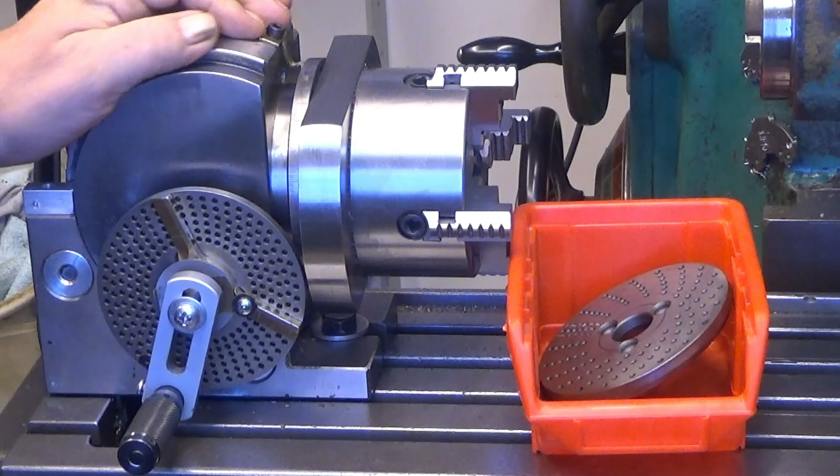Okay, here is the dividing head in question. And first let's take some things away from this.

Indirect indexing first. I have here a basket with all the indirect indexing components. And this is really something - it's just a flimsy tin. Okay, and then this one looks like it's brass, but actually it's cast zinc.

And then, I have replaced most of these fasteners so that I can use the same tool for this. This used to be so that you needed three different tools to get these plates away. And that's the story of this dividing head.

Please don't drop these onto the floor. And then the plate comes away. That's about the dividing head indirect indexing, and why I wanted to remove this. Now we need a different tool.

Maybe that one. This is because I want to disengage the worm. I don't want it to...

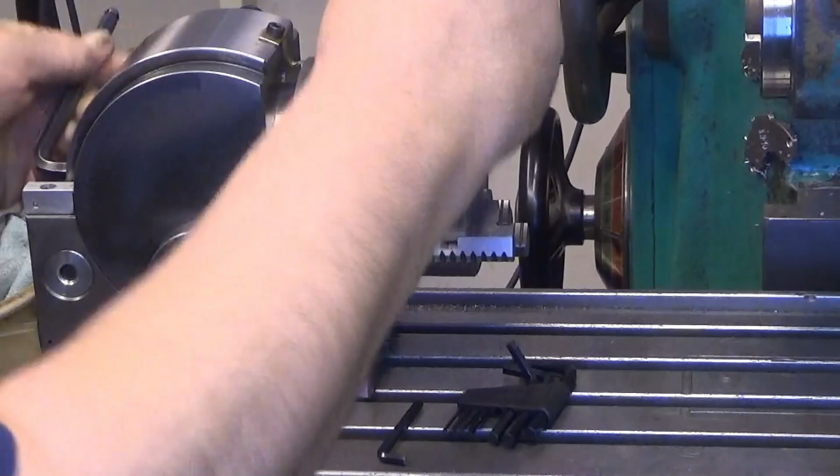Now this chuck, this system, I have a drawbar here. And this one, okay, it's like that. So we have here in the back - let me show you when it comes out.

It's like this - it's actually a very strange nut in the backside here. And then I should be able, if I engage the brake really tightly...

Which way is loose? This way. You shouldn't tighten it - so now you can. This one has - I think this is something like a Myford nose, I believe.

I don't know what this is called, but as you can see, there is a drawbar, and this one you can thread in. Maybe - let's not do it this way. So that's the chuck. So now we start to have access to all these components.

And that one I put also aside. And now comes the small components, and for those I need this. We have 3 little hex cap screws there.

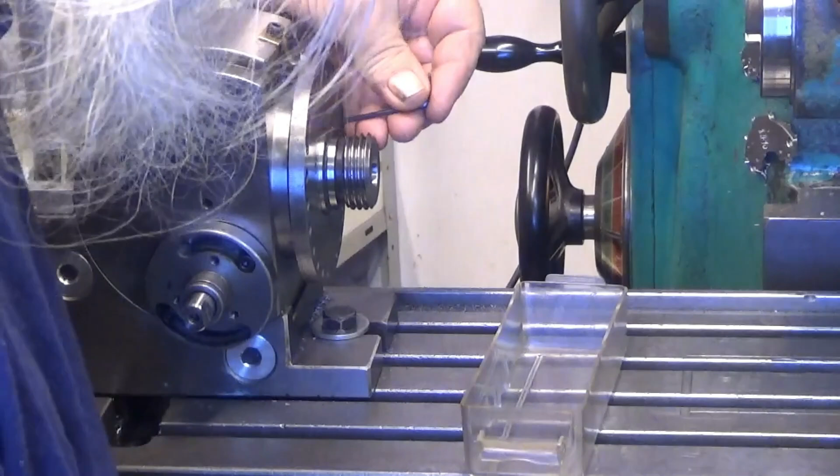What was the size? It's not this, it's something different. Let's try that first. Too big. Next. No, that was the previous one.

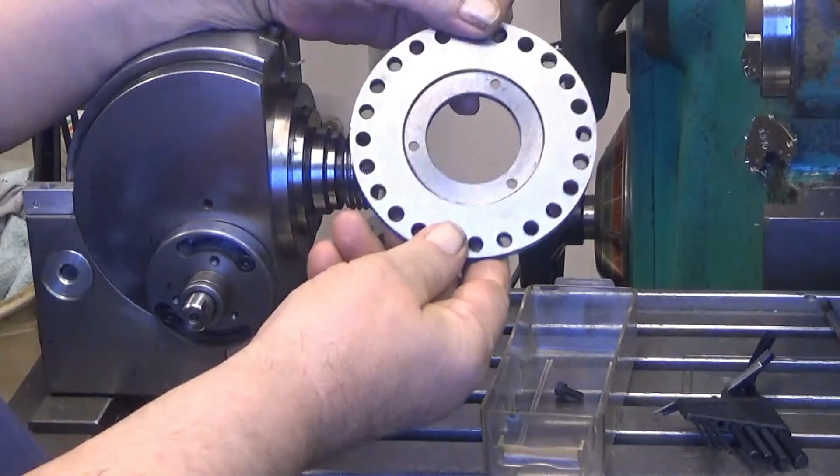Okay, these are easy enough to get away from here. That's loose now. Okay, last one - so then this comes off. This is just, as you can see, attached with 3 screws. And then we have the 24 direct indexing holes there.

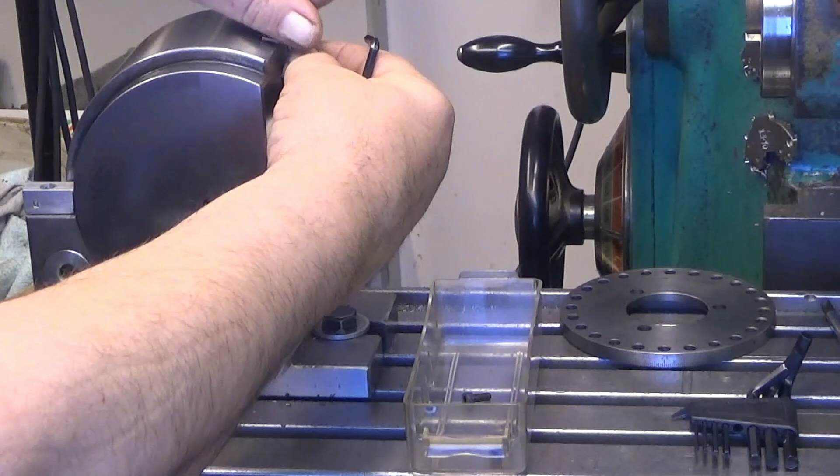Okay, and then we have that one, and that one is different. We need to take this away as well. That's a mildly funny looking thing, but it is - there it is. Okay, let the screw be there.

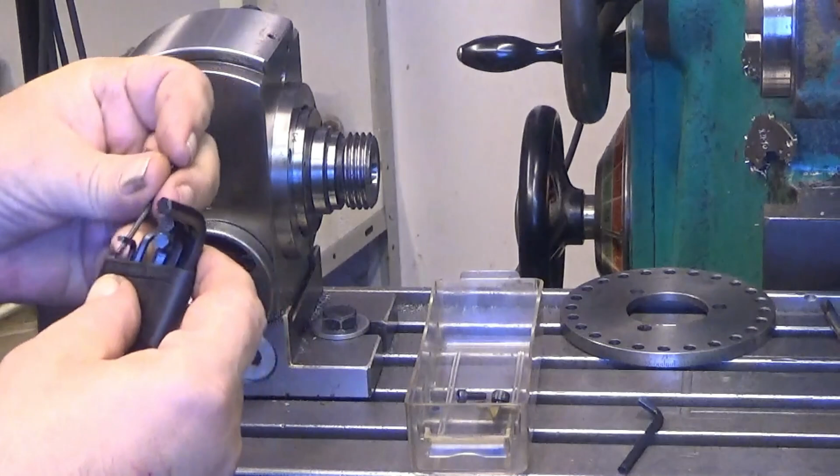And then in order to get this away, we have - I think it was really small - this one. We have here something, it's next. These are really small, really tiny. Oh yeah, okay, so you will soon see what comes out from here.

And this, I believe, is not the original design at all of Brown & Sharpe. This should be something else, I believe - not a grub screw like this, because this is the pinion now. It locks this, and if you look, it goes right into the middle of this.

It shouldn't. I think the original design was such that when you had this screw, it went over here, so it locked it that way in place. And this was, I think, rounded, so that when you put it there you couldn't get it out from there. So now this is one component I already took out.

This pin from there - this pin is something that when this disc is there, it will go by the pinion. Here is a rack. You can push it from some into the holes here like that. It pushes it into the hole, and yeah, that's the way how this works.

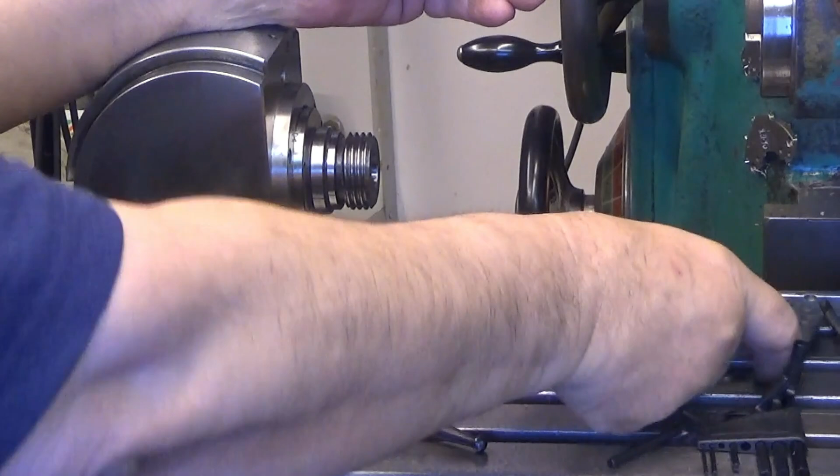But now the problem here is that the teeth here do not mesh - it slips. Now if I put this into here, it goes into that. Oh man! Need to be careful. Oh man!

Let's try with these - these have a wider tip, the others were needle sharp. Hopefully this fits in - yeah, it does, so I can get it out from there. Oh man, so it drops in. So it comes inside here from the side, and then like that, and then you can push it with this one. And it's really sloppy.

At the critical point it is really sloppy. And this also has all sorts of... yeah, okay, anyway.

I would estimate that the gear teeth are about 1 millimeter too low. If I measure it from here, so there is a flat. This is a 10 millimeter pin originally, so it is about 10 millimeters. Yeah, there is a little bit of a taper here, and it's not straight.

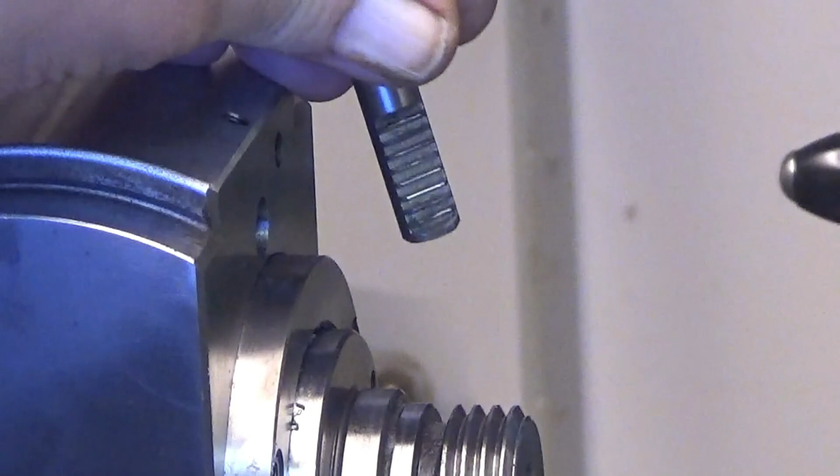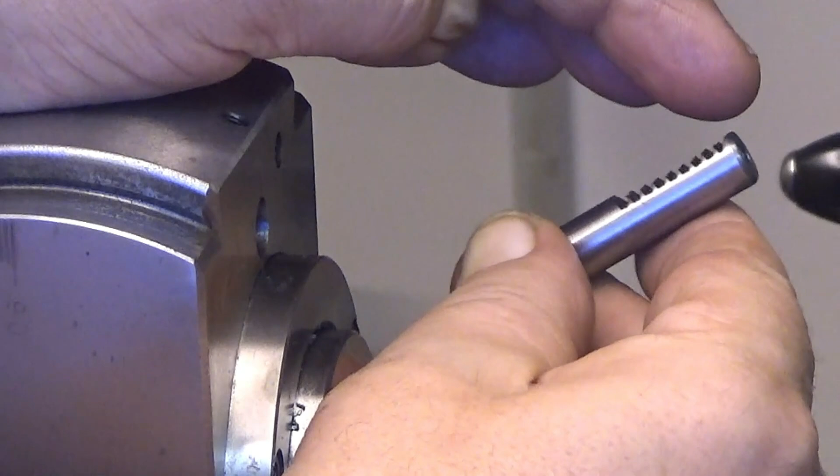Well, but anyway, the thickness, if you can see, let me zoom you in a little bit. Okay, there you are. Now when I measure this, there is a flat, as you can see on top here. This flat is 10 millimeters, and if you measure from the bottom to the flat top, it is 9.25 millimeters. So they have taken it flat on the top, 0.75 millimeters taken away from the top. And now, as it happens, module 1 cut depth is 2.25 millimeters.

So now when I measure the bottoms of these teeth, the same way, they are at 7 millimeters. So originally the intention was that it should be like a module 1 gear, but the division, the pitch of these, is not module 1. So it's something else. It's really something else.

So, well, but what I will do is, yes, because now it looks like we are at least 1 millimeter wrong here.

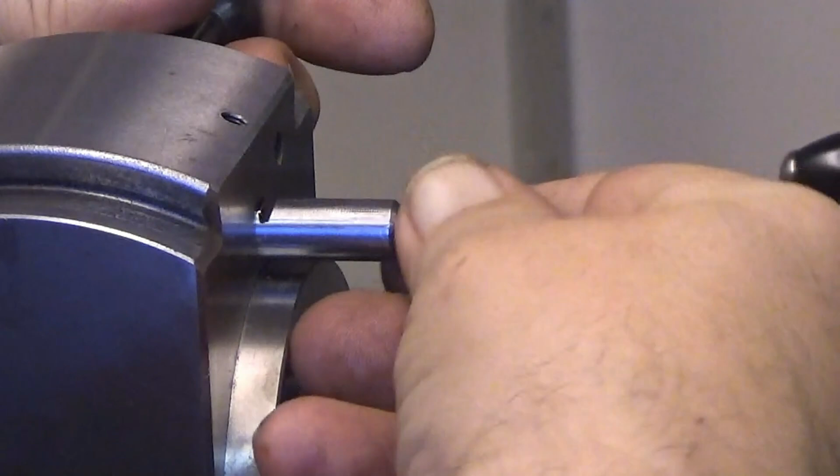If I don't now push it all the way in, so I can tell by rotating this. It rotates like that, and it rotates so much that I can tell something like 15 degrees. So I can tell that it's about 1 millimeter at least. The bottom, the gear teeth don't bottom. So I can raise that about 1 millimeter, maybe a little bit less.

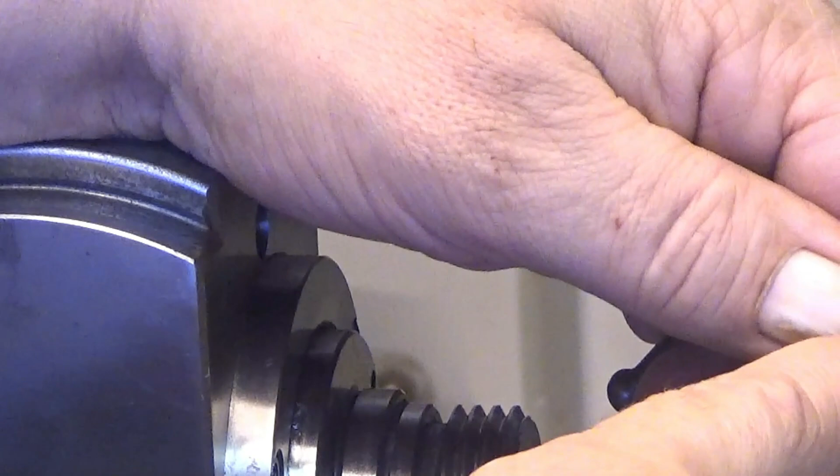Maybe 0.75 millimeters or maybe 0.5 millimeters. So I make a shallower cut for this gear rack, but I keep the, let's see now, that dimension here shouldn't go, and it doesn't go, I know it doesn't, it almost goes there. Almost. So this is probably in the correct plane, but the teeth are not.

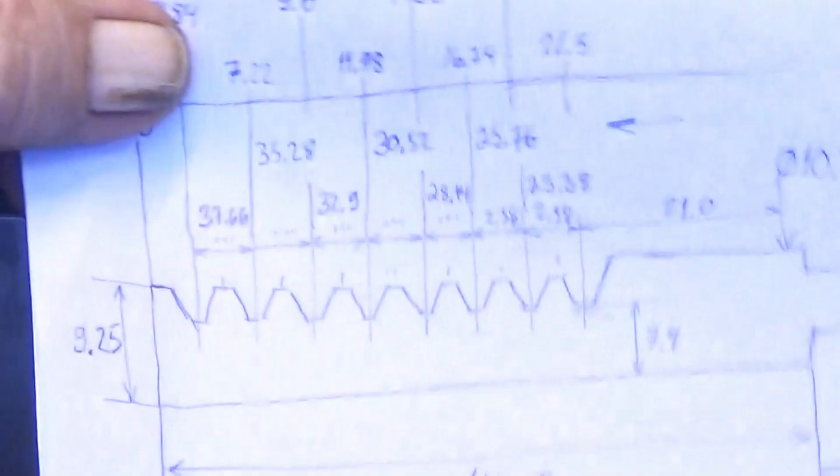So what I now will do is go to my lathe and remake this piece. Now I will present you, let me zoom one more time. Hopefully this shows out so you can see. This is a picture about this.

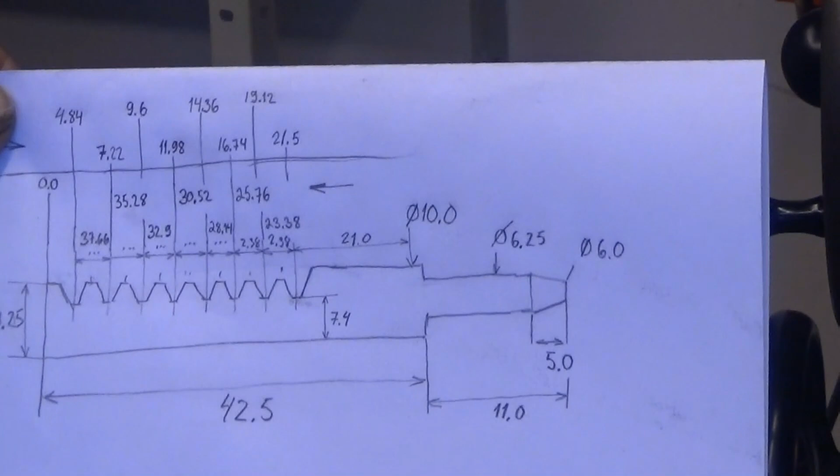If somebody is going to reproduce this, here are the dimensions, and you can see there is a small taper at the end. That's important, really, and those holes are tapered. So those are the dimensions.

It sure helps if you push the record button of your camera.

Well, at this point I just chucked a 12 millimeter piece of cold rolled steel rod into my lathe, and then I made a good surface on that one so that it's accurate to measure. After that I measured it and noticed that there is 0.07 of a millimeter taper.

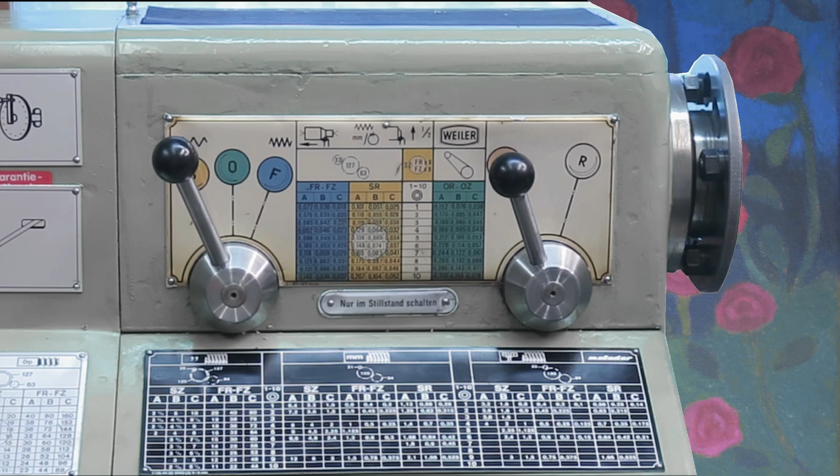And so the next step, which you hopefully now will see, is that I'm adjusting the tailstock using an alternative method for doing this. So I'm measuring it from the back side of the workpiece. This is to double the deviation. If I would measure it from the tool side, it would not - I would see nothing, no deviation there. And from the back side, I will see double the taper.

So now, when I move it to the start point here, then I can reset the dial here. I will put it on 0 here, like that, and then I go against our stop, like that. So I can see that we have 0.07 millimeters here, 7 hundredths of a millimeter deviation. So I need to halve that.

The nice thing about this measurement is that this is relative. I don't need to know where this workpiece is pivoting. When you just simply adjust the tailstock measuring how much it moves, you are relying on the fact that it will pivot at a certain point. But I have no idea - it might be in the bearing of the lathe, it might be the tip of the chuck, it might be somewhere there in between.

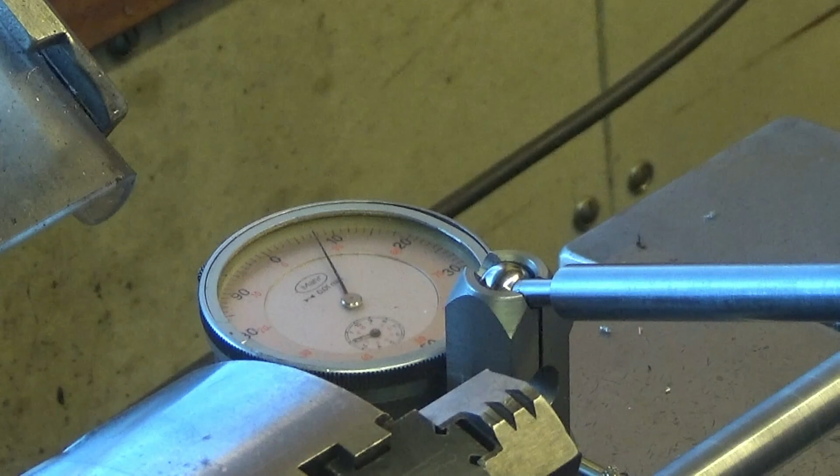Okay, so I halve that. So I'll now loosen the tailstock, but I will move it now to 3.5. And you will soon see that it's not actually 3.5 there. And now when I move back, it's no more at 0 here, as you can see. So then I need to re-zero this and see that we have 3.5 hundredths of a millimeter deviation here. Well, it went bigger. So that was absolutely the wrong direction.

Man, the other direction, please. So I need to have this deviation like 3.5 hundredths. And now it's 0.1. A little bit more. And the directions here are really, it's very easy to mix up. And where is this? Okay, a little bit more, let's see what happens here. Let's zero it here.

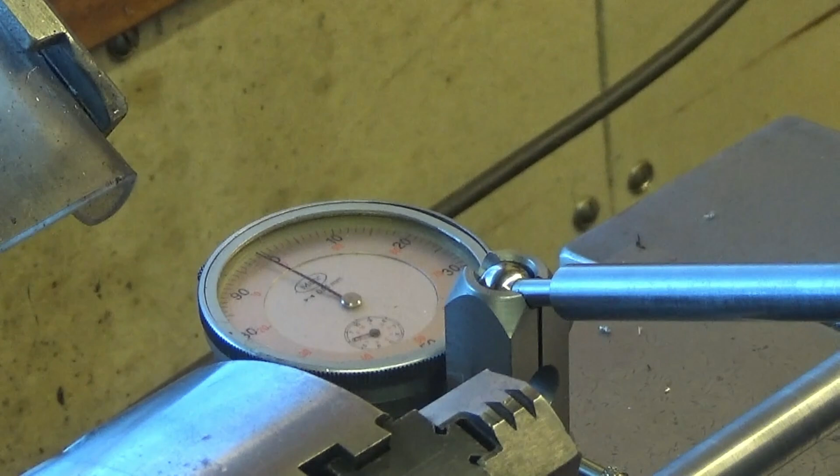Let's try that one. 0 is here. Then go here. Now it is. So let's tighten this.

Loosen the screw that will deviate the tailstock. I will not let it be in tension, that one. So I loosen it when I'm finished, and then I recheck that we have the deviation of the 3.5 hundredths here now. Yeah, quite exactly. And this was tight, yeah.

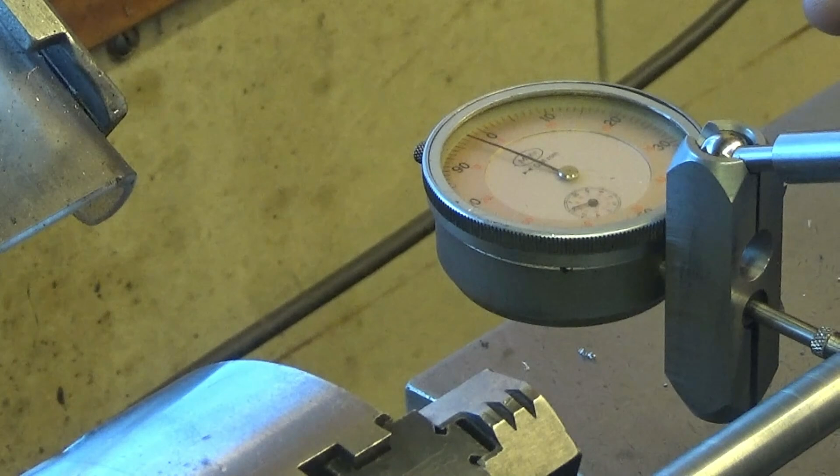So there you are. The nice thing about this is that when you do it this way, you get it done in one go. You don't need to do this multiple times. It will be straight after, and we will see whether it is or not very soon.

Let's do a test turn here. I already aligned this compound with the end point here and etc. So now I just touch it because we have lost all those setups.

Actually, we didn't do it. Oh yeah. So let's take 0.25 millimeters. Oh, no. And this is always, I don't know why this happens to me. Tighten the tool. Okay.

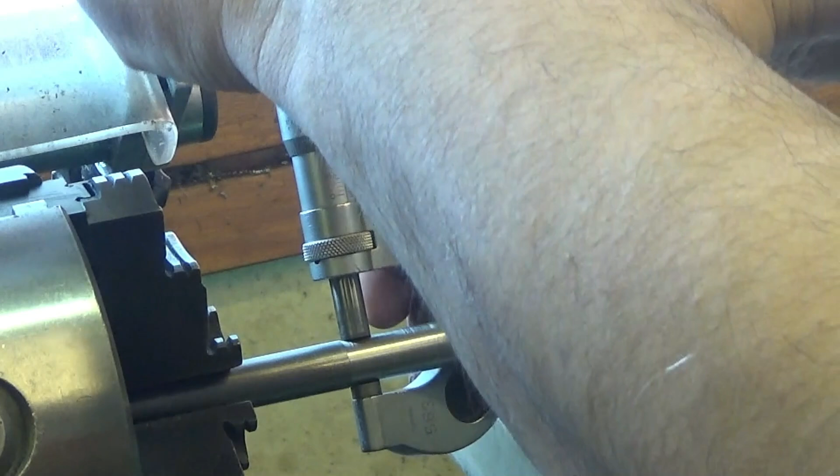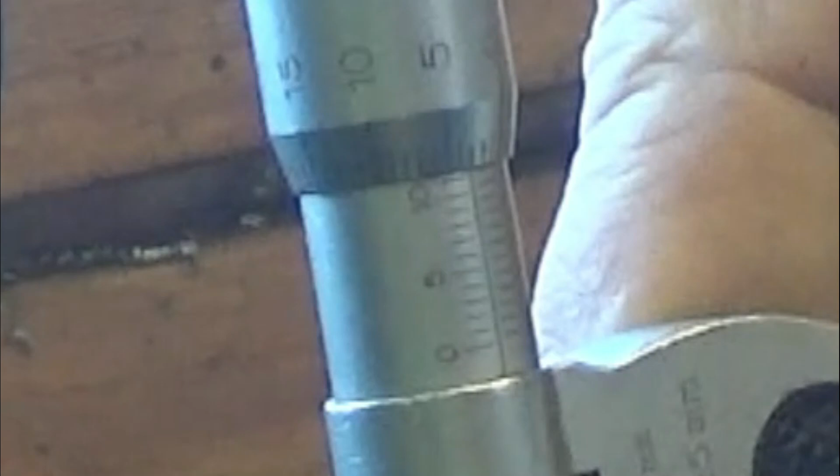Now, let's measure that one. First, this end here. I try to arrange the camera in a way that you can see this as well. So, this is now 11.53. And this is 11.54. Well, 1/100th of a millimeter deviation in that distance.

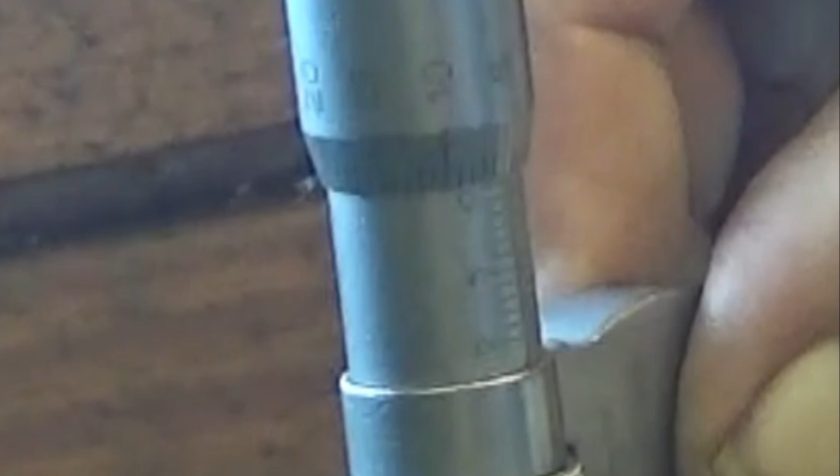It was earlier quite a lot more. So, yeah, okay, there we go. Now the dimension, the nominal was 10 millimeters. But then I put our 10.02 millimeter pin into the hole where this goes, and it's a little bit loose. I would say like 3/100th of a millimeter loose. So I would make this something like 10.04.

That would be, yeah, so let's take now 0.25 millimeter cuts from here. We are not in a hurry, so.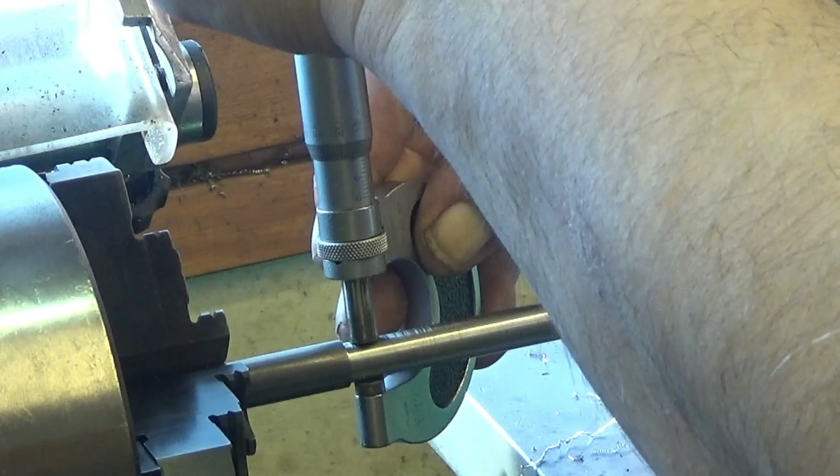Well, it's still a little bit rough, I would say, not the one I'm after. 10.06, and this is probably 7 or 8 even. It's 10.08. Okay, I leave it now at that.

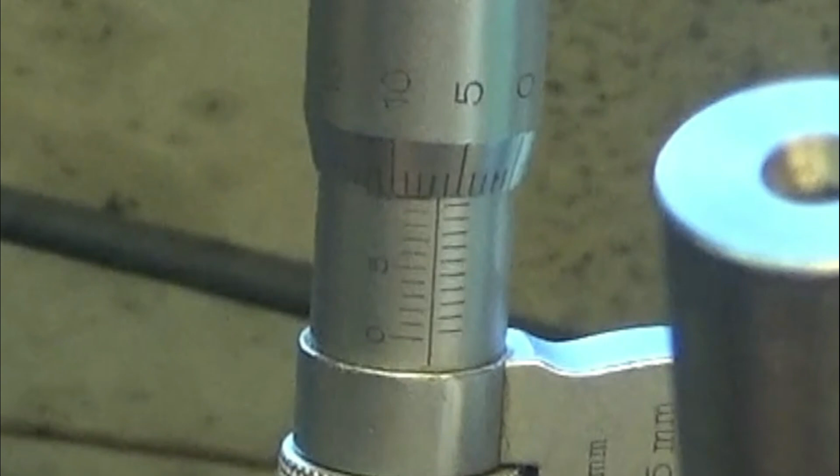And next step I will take some emery paper and I will... Okay, so let's measure this one more time so that we know what we need to do. Our target was 10.04. And at this side we are at 10.06. And this one is 10.08.

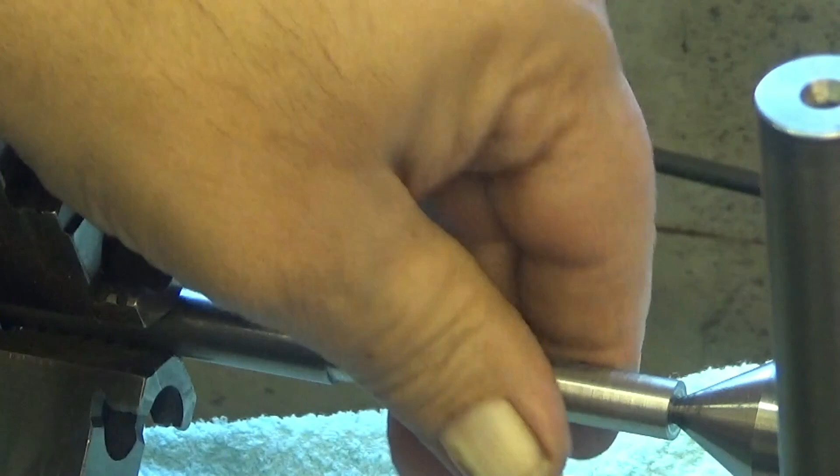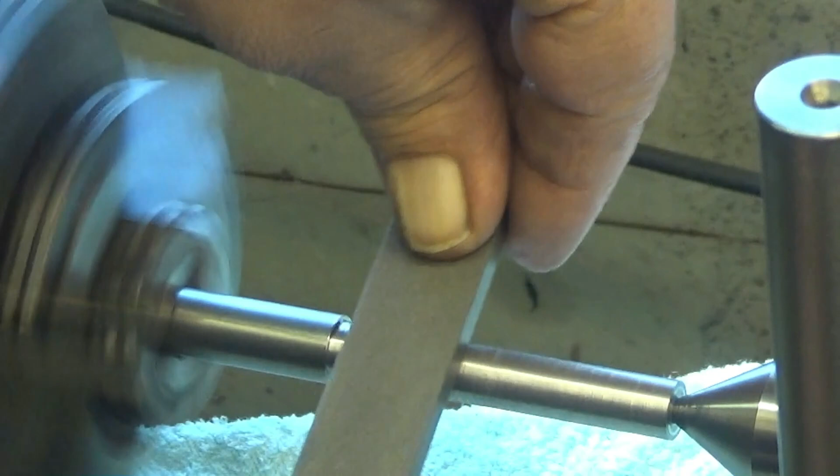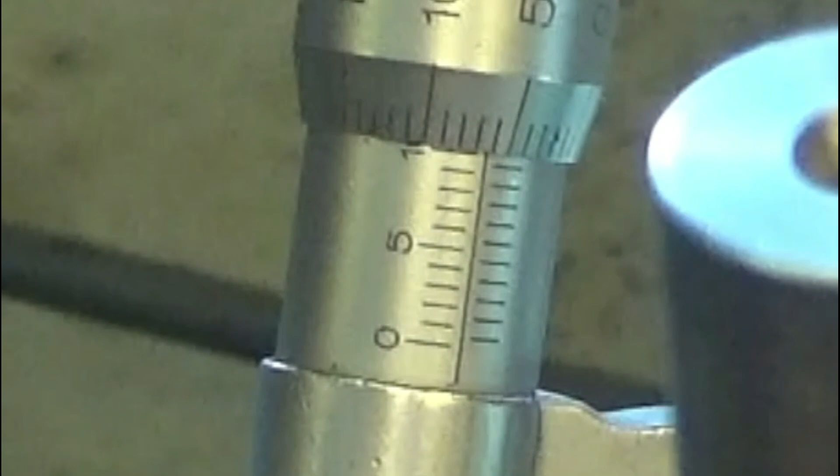Okay. So now this was 8 and now it's 7. So 1 hundredth away from that. In the middle we are at 6, a little bit over 6, and here we are at, the taper is now gone.

So I can now do it evenly, even wipes. And I need to take away 2 hundredths of a millimeter. Well, that's not too bad. Oh yeah.

Well, now turning the end a little bit smaller. It would be 6.25 millimeters in diameter this time. So, well, I have set up the stops, etc. It will stop quite exactly at 11 millimeters here. Hopefully.

And I'm using now 1,800 revolutions, so it's really fast. Because the diameter is so small, it needs to be fast.

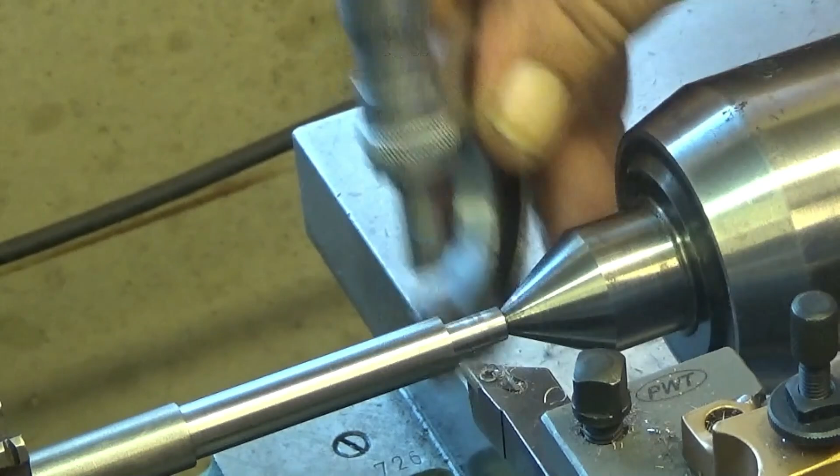There it is. Like that. Okay. So it should be now 6.25. It should be, but you never know. You never know, but this time it's, well, it's quite exactly.

I'm adjusting the taper here. So in the distance of 5 millimeters, it should be 0.25 millimeters. So in the distance of 40 millimeters, it should be 2 millimeters exactly.

So let's see, now I have set this up quite coarsely, so let's see how much do we have here in 40 millimeters. That was 1 millimeter, and that was 40 millimeters travel, and we still are missing something here.

So let's adjust this just a little bit more. Like that. That should be the correct value, but since it seems to be less, let's put it like this now.

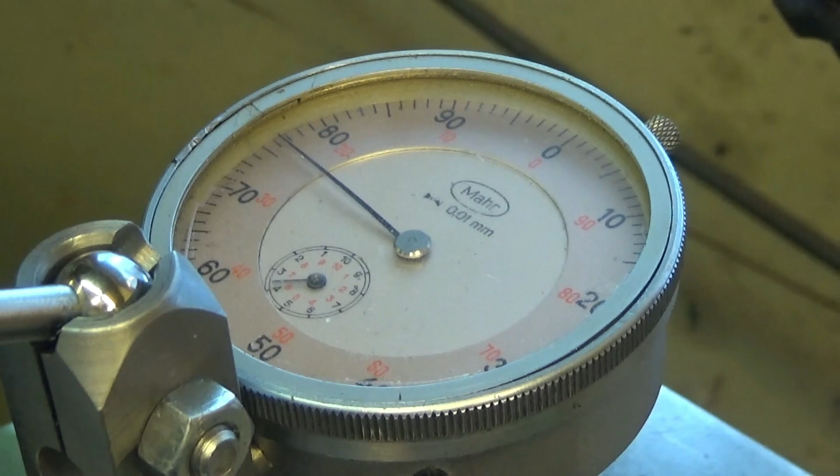Roll it back to start where we start this. 4 millimeters, and of course this is now following the hypotenuse of our measurement. So it's not exactly 4 millimeters here now. So let's put this into 0 and try again. 1 millimeter.

We are there now. Here I make a rookie mistake. The dimensions, the taper, I did measure from diameters. Here I'm measuring the radius. Well, this means that the taper will become too steep. Luckily, later on, I wake up just in time.

Well, I'll accept this one. This is good enough.

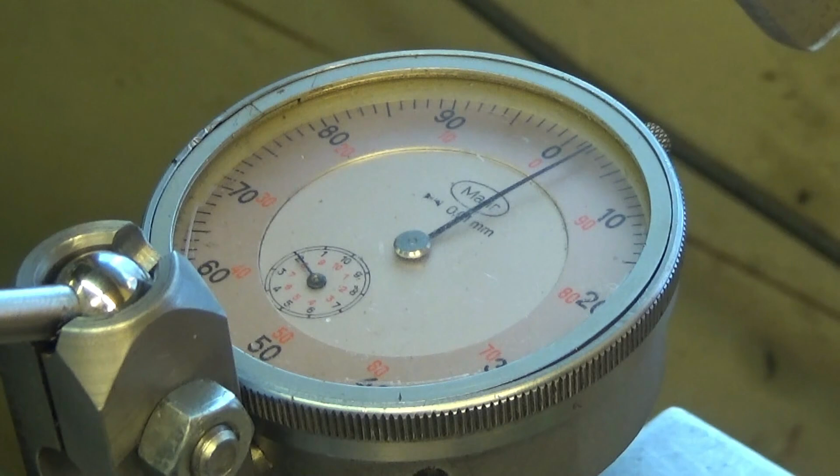So now, turning the taper at the end of this stick. I have blued this end, and this faint line here is the 5 millimeter mark. So the taper should reach to that point. And I'm using this boring bar because other tools I was not able to reach with. So I'm using quite high speed here and feeding totally manual.

So let's first touch this one. Okay. Hopefully we didn't - no, we did not. Okay, now I take 5 hundredths of a millimeter more. Then 5 hundredths of a millimeter more. Five more. Five more.

Start with that. Okay. Now let's take 500 more. Well, 500 more. But we should be there now. Well, actually we didn't spoil it. I caught the error in time. Yeah.

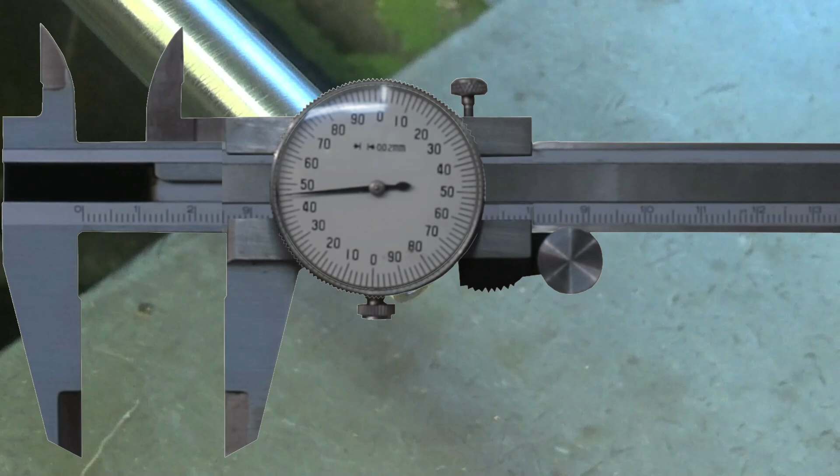Well, now we have the taper there. I did some beautification for this thing, and this is the side where it punches into this disc. And let's see now how deep it goes. Like that. Leaves exactly what I need. It's the 5 millimeters it should be. Yeah, okay.

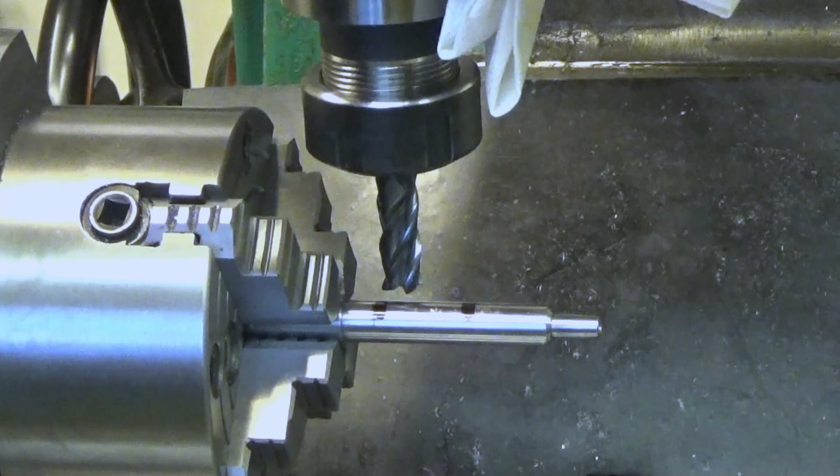Milling 0.75 millimeters from the top of that. And you see the black lines. This is not really exact science how much I do this - it just needs to be enough. And when I make these black lines disappear, then that's enough.

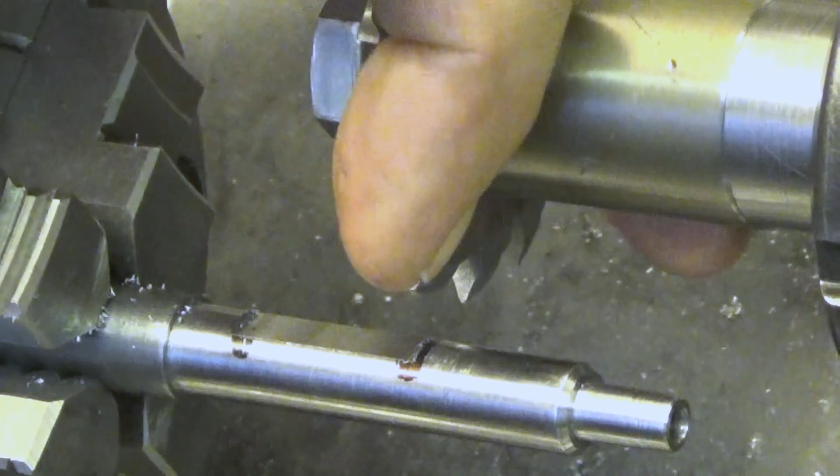That's about it. Cutting the gear rack for this one. And this is a module 1 cutter. This is module 1 cutter number 8, meaning that it's intended for gear racks.

And when I look into the original, it has even wider gap there underneath than this one. So if I match this with the teeth of the pinion, it matches quite well. But the division, the pitch of these, is nowhere near module 1. So therefore, well, I have a table where I can check these.

But since this is rather flimsy, I will take several cuts for each tooth, maybe 0.5 millimeter, so that - well, nevertheless there might be some chatter. So let's just start this one.

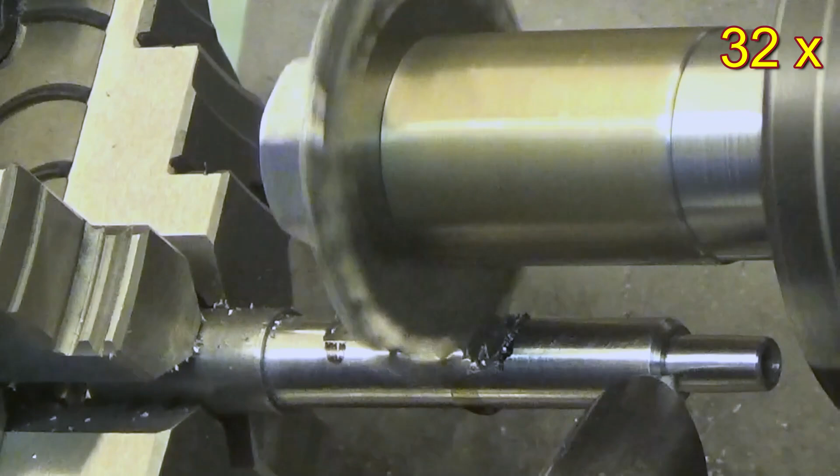Yet another rookie mistake - misplacing these teeth by 1 millimeter. Well, I should have stayed in bed. Persé.

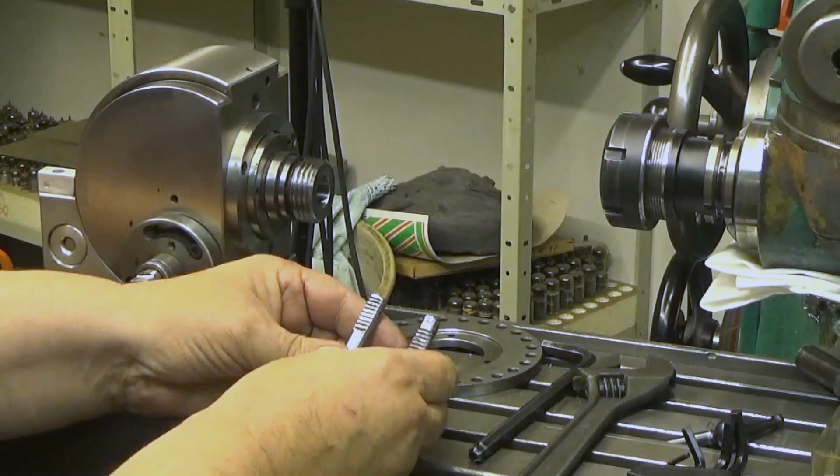So these two are now ready. This is the new one and this is the old one, and as you can see it's quite a bit longer. And well, for the gear rack, I made one mistake here - there is one tooth that is lower than the others because I mistakenly cut 1 millimeter aside. Man.

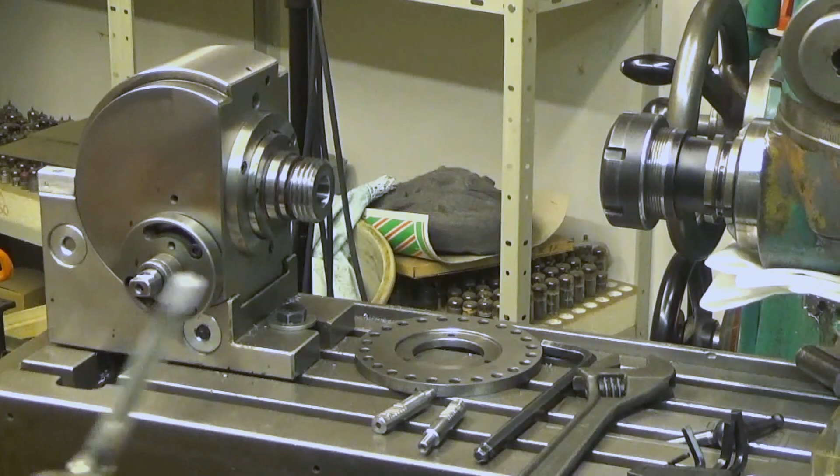And furthermore, now this fits quite perfectly there. It's a little bit tight, but so it should be. Let's put some grease into there. Ow. So I have here some grease which I should put there now. So I have done quite a lot of deburring with this one, and it's really, well - there you are.

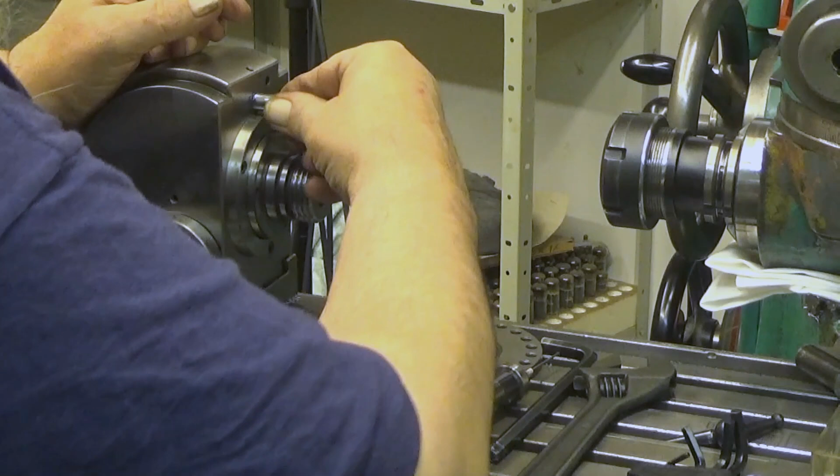Oh, well. Okay, and now this is the thing, and of course I already tested this and it meshes really well. Yeah. And it's a little bit tight on one side, but let's see now, it should be about there, I believe. Maybe one step more. Yeah, okay. And it works really great.

So the teeth in this one are 1 millimeter higher than in this one. And there is still a little bit of play here, not that much. So from there you can guess how much this was on the edge of - it was actually slipping. So this one is now, well, into the bin.

So yeah, let's put this together. And now I should - wow, it's there. Oh yeah, that's it. Fixed. Fix und fertig. Yeah, aus die Maus. Ready to go. Whatever.

Well, in the next episode of Finno-Ugric Machining, we are going to make 6 precision pins and put them into the cycloidic drive base. I'm still wondering whether I should make them a shrink fit or glue them into place. Well, gluing is easy, shrink fit is better because in that way they are going to be straight. But we will see in the next episode of Finno-Ugric Machining what I have decided. Till then, bye!